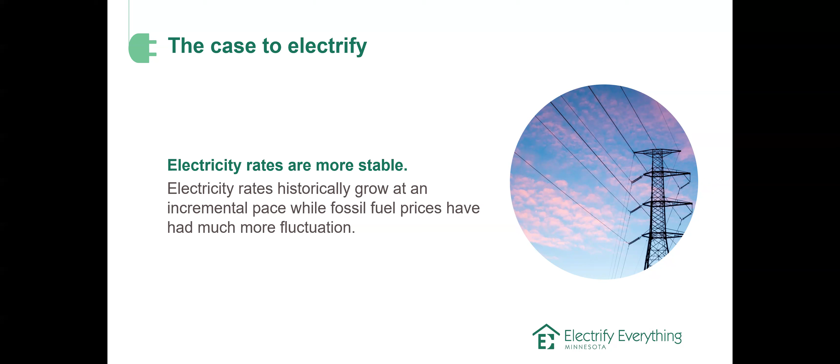Electricity is also safer. A lot of gas appliances like stoves and natural draft water heaters leak hazardous gases back into the house, and those can have really adverse effects on our health. So when we switch to electric, we completely eliminate those health risks. Another reason is that electricity rates are more stable. So the Public Utilities Commission of Minnesota regulates electric rate increases, so they're a lot more predictable and incremental, whereas natural gas is bought on the open market, so there can be really big spikes and valleys over the years, and it's harder to predict.

And then another big one, which draws a lot of us to this topic, is that electrifying your home is one of the single biggest things you can do to reduce your carbon emissions and help the planet. So if you're motivated by helping the environment, this is a really powerful concrete action you can take. So there's a lot of good reasons to electrify, and it can feel complicated and overwhelming at first.

There are a lot of questions that come up, like how do I decide which projects to pursue first? What does my house even need? What are the types of equipment I should be looking at? How do I compare one to the other? What are the resources and how do I make sure I get all the incentives that are available? And then who are the contractors I should talk to? What could I do myself? Who is going to actually install this in my home? So there's a lot of questions, and the goal of our program is to have answers to all those questions in one place.

And like I said earlier, we encourage you to start with where you're motivated and what makes sense for your house. So maybe your water heater is really old and that's where you need to start. Or maybe you really want to reduce your carbon emissions, so we're going to talk about what's the biggest carbon emission impact. Or maybe you just want to do the smallest, cheapest step first, and we'll work our way up. So really, whatever approach you're bringing to this, we want to meet you there and help you start that project.

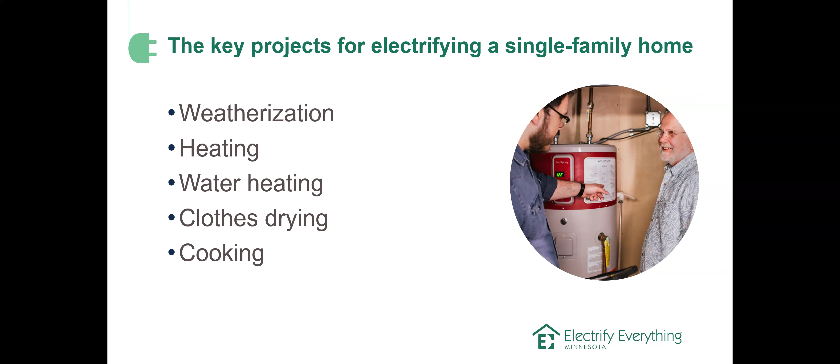So the key pieces of a typical home for electrification are weatherization, heating, water heating, clothes drying, and cooking. So I'm going to go through each of these one by one, starting with weatherization. And again, throw any questions you have in the chat and we'll get to them at our Q&A session at the end.

So what is weatherization? Weatherization refers to the part of your home that keeps the outside out and your inside conditioned air inside. So that's the insulation in the walls in the attic, that's air sealing, all the cracks, and then it's also your windows and doors. So what's the barrier between the inside and the outside? The reason we start with weatherization is that it's really important for electrifying your heating system, and I'll dive into why that is.

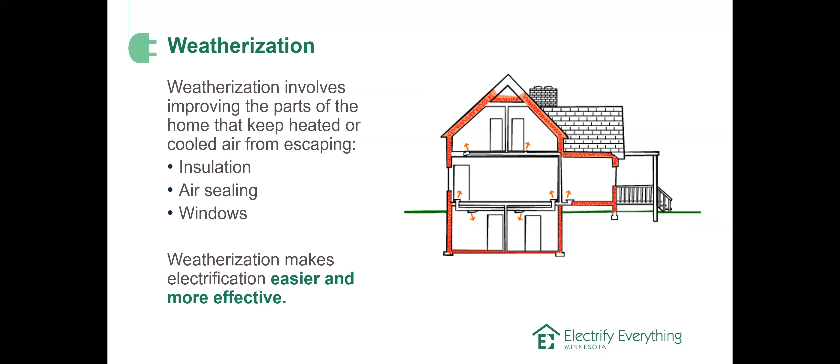But there are a lot of good reasons to insulate and air seal your home. And I think I was surprised by this when I first learned this, and a lot of people are. We live in Minnesota, it's super cold, and yet a lot of our houses do not have proper insulation and air sealing. The reason for that is before 1980, there was not an energy code that required insulation to be put in houses. So homes built before that time often don't have any or lack adequate insulation. But it's a really great first step to take.

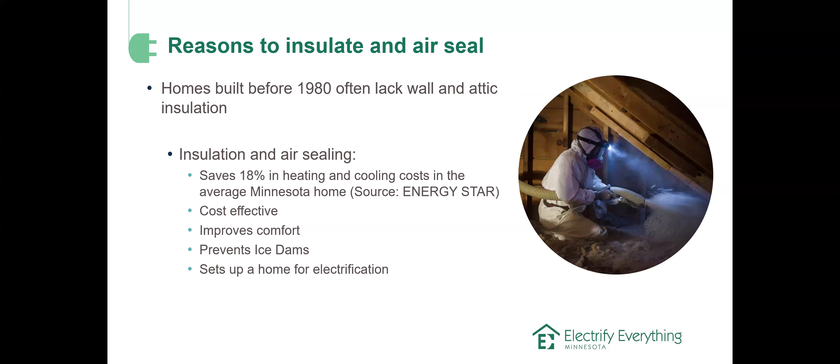So on average in Minnesota, you can cut your heating and cooling bills by 18% by insulating and air sealing. That's a significant amount of money and energy. It's also really cost effective. You're reducing how much energy you need to keep your home comfortable. So you're lowering your energy bills, and that will pay for the insulation, usually in 7 to 12 years. It also improves comfort. We've all been in cold, drafty homes that are not super great to be in. So it really is a big quality of life improvement. You can prevent ice dams, those big icicles. And then, as I mentioned, it sets up the home for electrification.

We can all picture insulation. It's the pink stuff or the white fluffy stuff. But air sealing is kind of the less acknowledged partner of insulation, and it's super important. So air sealing is sealing up all the cracks in a home where your conditioned air can escape. So that's like around light fixtures, your attic hatch, your bathroom fan, any venting pipes that go through the ceiling, and then also things like dryer vent holes. Anywhere there's a crack in your home, that is just letting the conditioned air escape from your house. So it's really important to seal those up along with doing insulation.

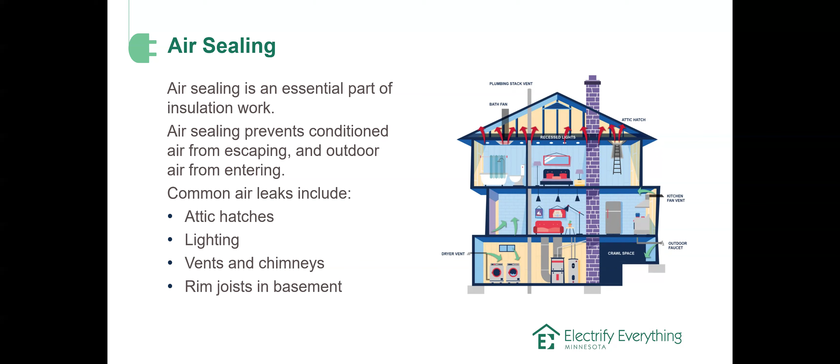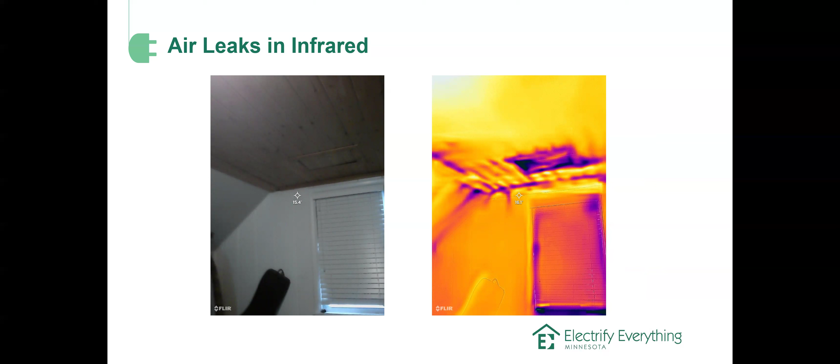Here's a picture from a Home Energy Squad energy audit. On the left is the picture, and on the right, the purple areas are where air leaks are happening. So you can see the attic hatch is super leaky, where the wall meets the ceiling is leaking. Even this wooden paneling has leaks in between it, and then the window too. And in an old house that hasn't been air sealed, all of the little cracks can add up to a 2 by 2 foot hole, which is like having a window open all winter long. So sealing those up is really powerful.

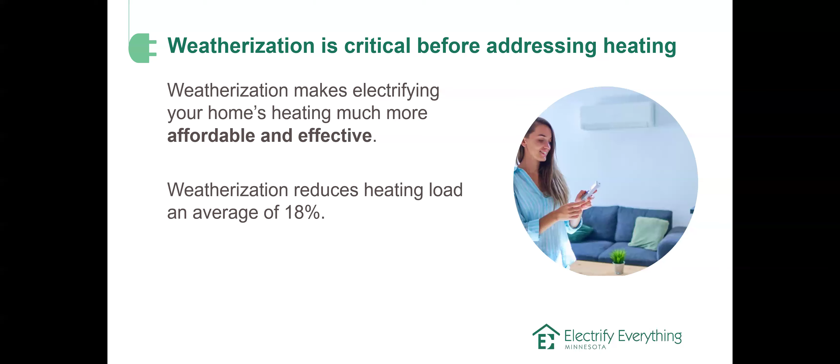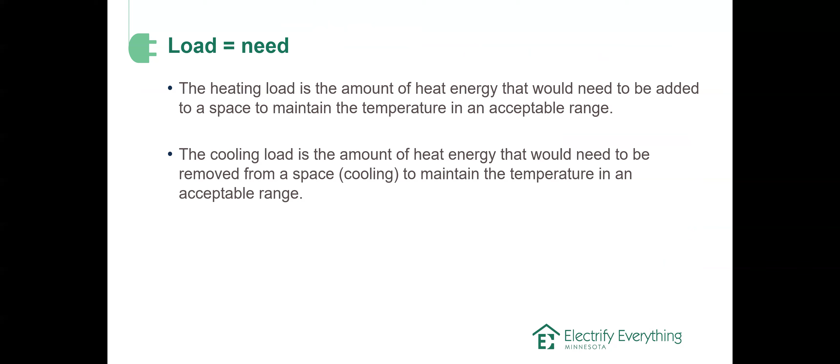As I mentioned, weatherization is really important for electrifying your heating system. And that's because it reduces the heating load required in your house. And the heating load is just simply how much heat energy is required to keep your home at a comfortable temperature. The cooling load is just the opposite. How much cooling do you need in the summertime? So when we're talking about weatherization, we're talking about bringing that heating load down so then the heating system doesn't have to work as hard.

And then starting next year, when the Inflation Reduction Act rebates will go live, there'll be an additional $1,600 that is available to folks earning less than 150% of area median income. There are also some cities that have rebate matches. So if you live in those cities, you may be able to get more incentives.

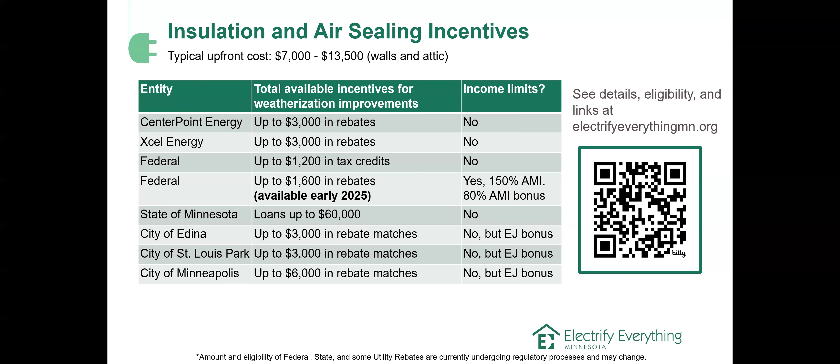So we'll be sharing the incentives for each type of project we're talking about today. And again, you can go on our website, click on the project you're interested in, scroll down to the resources section, click on details and links, and you'll find everything you need to know, including the links to the providers of these incentives.

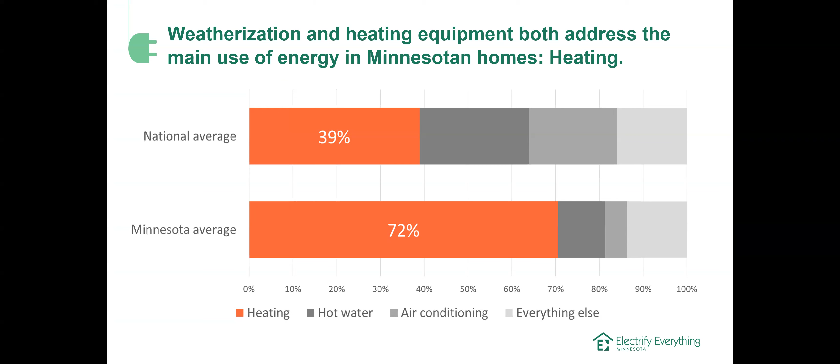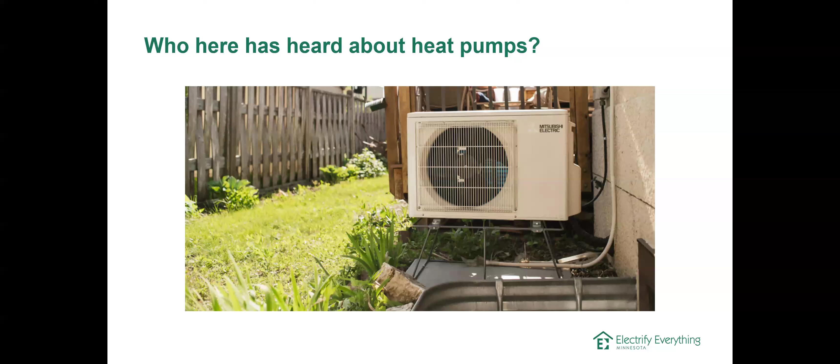So who here has heard of a heat pump? If your camera's on, feel free to raise your hand or give me a little thumbs up reaction if you'd like to. But if you've heard of a heat pump, we're going to be talking a lot about them. I'm seeing a lot of thumbs up. Thanks, everyone.

Heat pumps are basically advanced air conditioners that can also run in reverse. So in the summertime, it works just like an air conditioner. It removes heat from inside your home and moves it to the outside. And then in the wintertime, it moves heat from the outside air into your home, even when it's really cold outside, which is why this technology is so powerful.

Also, when we're talking about electrifying your space heating, it's really important that we focus on heat pumps. This is a really efficient technology because electric baseboard heating, the old style electric heating, is literally just heating up a piece of metal with electricity. It's super energy inefficient. It leads to really high energy bills, and it uses about 3 times more energy than a heat pump does. So when we're talking about switching to electric, going with the efficient heat pump option is what makes the most sense cost-wise, and also for the environment to not use so much electricity.

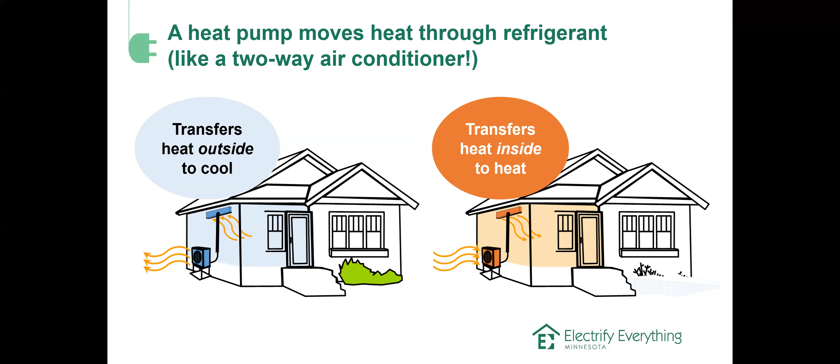Another reason why air source heat pumps specifically are really powerful and a really good option for a lot of folks is they have a lower cost compared to systems like ground source or geothermal. And they're also really flexible, so they can fit in most homes. There are 2 main types of systems that I want everyone to be aware of. One is ducted and the other is ductless.

A ducted or central system would basically just replace your central air conditioner, and then the refrigerant moves the heat into the house, and then it uses the same air handler that your furnace uses. So if you have ducts in your house with a furnace, this is the type of system you would get.

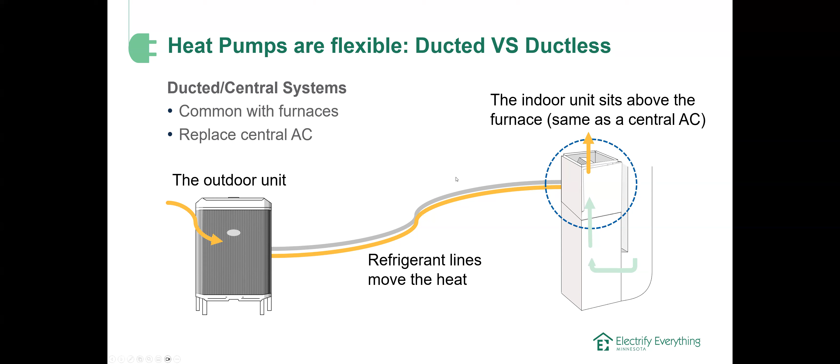The other option is a ductless or mini split system, which is for homes that do not have ductwork. So if, say, you have a boiler or electric baseboard heating, this would likely be the option that would fit in your home. Same thing, it's got the outdoor unit, and then it moves the heat through the refrigerant lines to these indoor units called mini split heads. And you can have one to multiple in your home to heat different parts of the home.

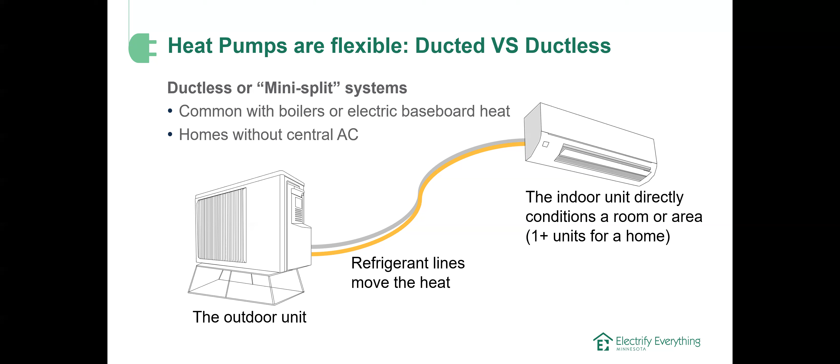So this is a great way to bring air conditioning to a home with a boiler that would have to be using window ACs. And it's also a really great way to heat your home with clean electricity.

All right, now let's talk about the efficiency of cold climate heat pumps. I say cold climate heat pumps because now there are heat pumps that are designed to work in Minnesota's climate, but there are also less efficient heat pumps designed for the southern United States. So when I'm talking about heat pumps, I'm talking about cold climate heat pumps.

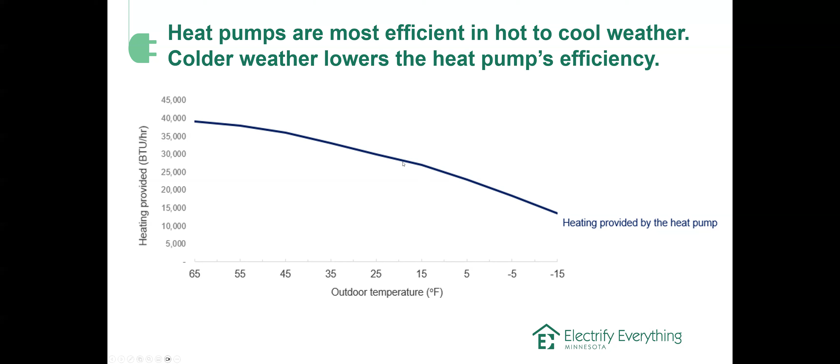So heat pumps are amazing. They can pull heat out of really cold air. That said, they do get less efficient the colder it gets outside because there's less heat to pull out of the air. So what that means is here in Minnesota, when we've got those polar vortex days, it is required that you have a secondary heating system to supplement the heat pump. And I'll talk about the details of that.

Another reason why we talk about weatherization is that as it gets colder outside, a heat pump needs more energy to provide the same amount of heat to the home. So in an unweatherized home, one that doesn't have insulation or air sealing, a heat pump can provide heat to the home in mild weather. But a well-weatherized home that's been insulated and air sealed can provide heat to the home with the same heat pump in much colder temperatures. When we have that smaller heating load, it takes less energy to provide that heating.

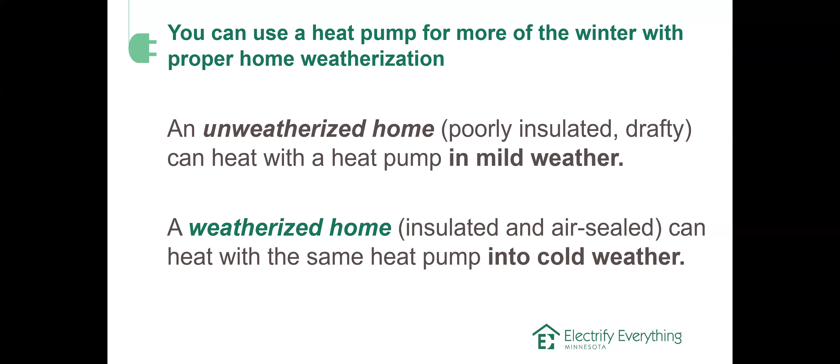The good news is that even though we get really focused on the polar vortex days, when you go outside and the inside of your nose freezes, the vast majority of the winter we spend above 20 degrees in Minnesota, in the Twin Cities area. And above 20 degrees, heat pumps are super efficient and they work really well. So the vast majority of the year, your heat pump is delivering efficient heat to your home. And then in that 20% of the time that's below 20 degrees Fahrenheit, that's when we're going to start talking about the secondary system that you'll need.

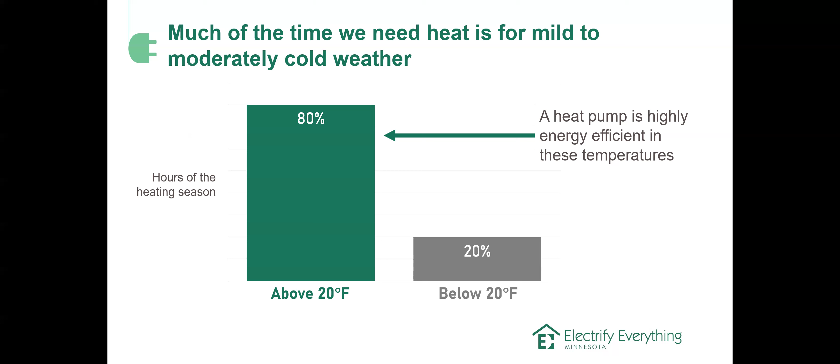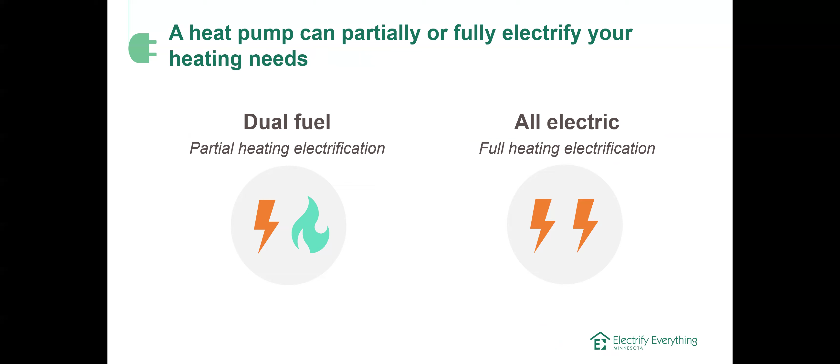So there's two kinds of setups for secondary systems. One is what we call dual fuel. This is where you have an electric heat pump that is paired with a gas secondary system like a furnace or a boiler. And then the other option is all electric. So you have a heat pump and then electric resistance as that secondary. And I'll explain the details of both of those.

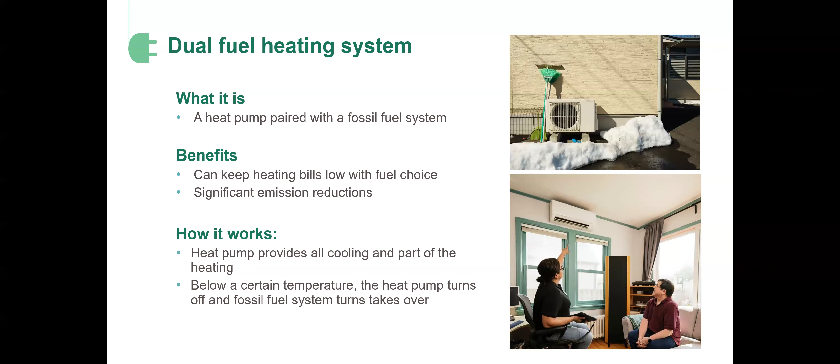So starting with dual fuel systems, this is a heat pump paired with a fossil fuel system like a furnace or a boiler. And the benefits are that it can keep your heating bills low because you can choose, depending on the different rates between gas and electric, whether you're using gas or electric. So you can keep your bills the lowest this way because you have that choice. And it still comes with significant emissions reductions because, like I said, about 80% of the time your heat pump will be heating the home. So basically, it provides cooling all summer and then heating for part of the winter. And then below a certain temperature outside, the heat pump will turn off and the fossil fuel system will take over.

So just to quickly exemplify that: summer, your heat pump's cooling your house just like your air conditioner would. Fall, heat pump is doing all the heating. Winter, your heat pump is heating the home most of the time, and then below the 20-degree mark or whatever you set it to, maybe that's 30 degrees, whatever you like, your furnace or your boiler kicks in. And then again in spring, your heat pump's doing all the heating.

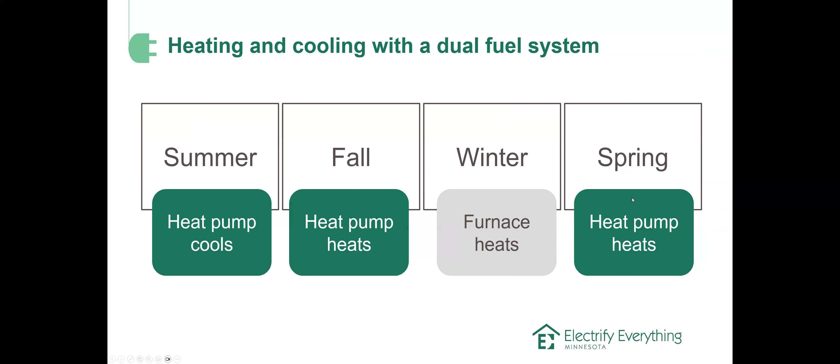So the pros of this are significant decarbonization. You're reducing your emissions by using the electric heat pump. And you have more control over the cost of heating. This is the way to get the lowest energy bills. One of the cons is it's not expensive, but a little more complicated to set up this system because the gas system needs to be communicating with the heat pump system.

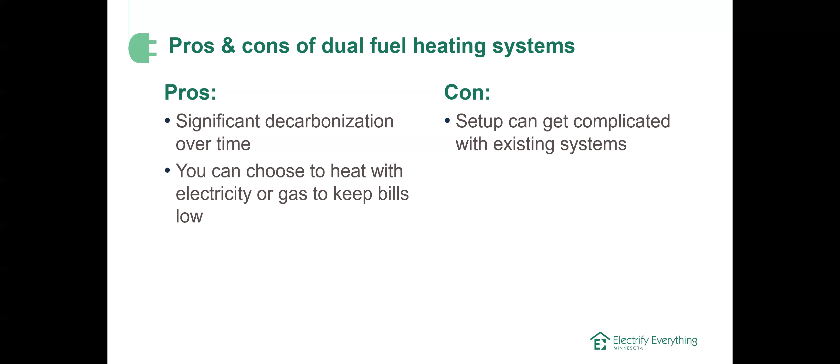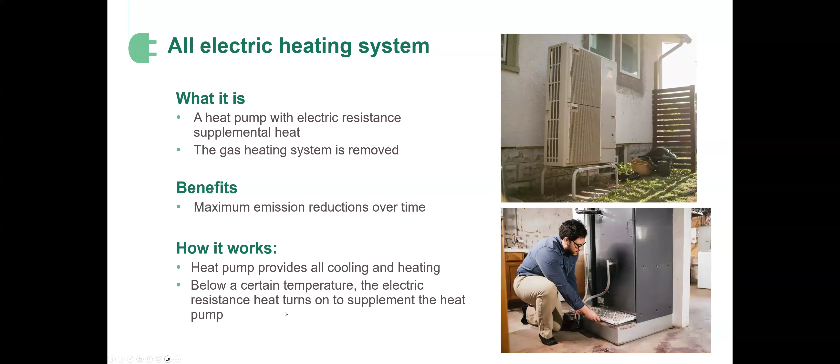All right, the all-electric option is next. So this is where the heat pump just has a secondary electric resistance booster heat. So you would remove the gas system completely. This is the way to completely electrify your heating and maximize your emissions reductions. And the way it works is the heat pump cools your home in the summer, heats in the fall, and then in the winter the heat pump keeps running all the time, but on those really cold days below 0 degrees, the secondary system will kick in to provide that little bit of booster heat that you need to keep your home at the temperature you set it at. And then again, in the spring, the heat pump's doing all the heating.

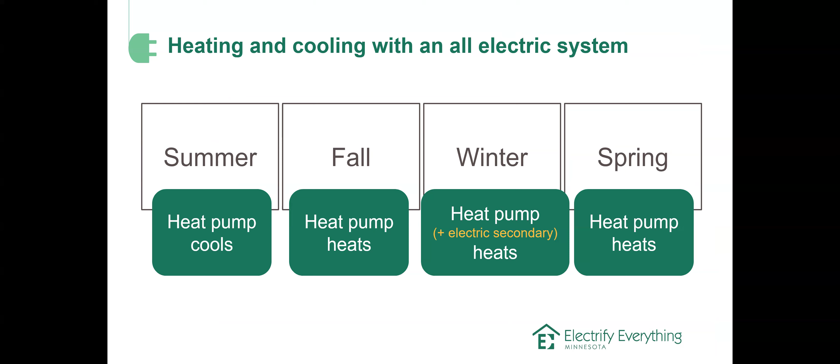So the pros of an all-electric system are that they maximize your decarbonization. You can eliminate your emissions from heating, and they can be simpler to set up because it's just the heat pump with that simple electric resistance secondary. The main con with an all-electric system is that your winter heating bills will likely be more expensive. This is because, like I mentioned earlier, electric resistance is very inefficient, and electricity is a more expensive fuel than gas right now. So on those really cold days when the electric resistance needs to kick in, that'll drive up the bills a little bit.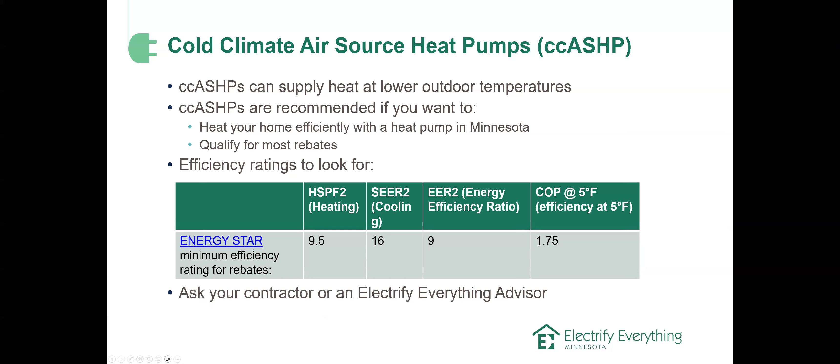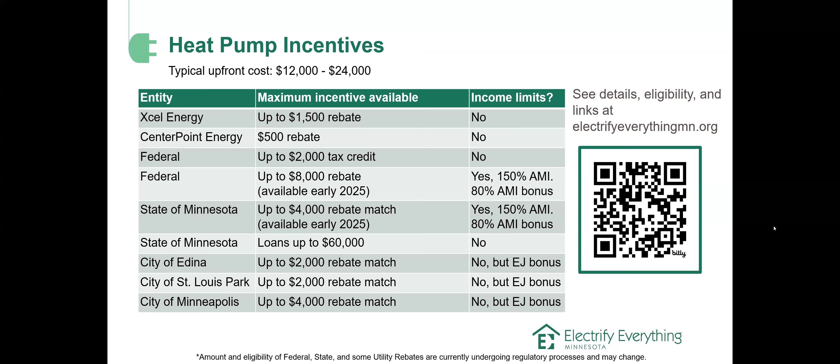Okay, we're going to keep it moving. So we talked about weatherization and heating. Now we're going to talk about your appliances. So water heating, cooking, and clothes drying. All right, starting with water heating. So after space heating your home, water heating is usually the next biggest energy user in a home.

So who here has heard of heat pump water heaters? Feel free to give me a thumbs up reaction again. Great. So heat pump water heaters are electric water heaters that are super energy efficient. They are about 3 times more energy efficient than a standard electric tank. And they're safer than gas because they don't have that exhaust system that can backdraft and leak back into your house.

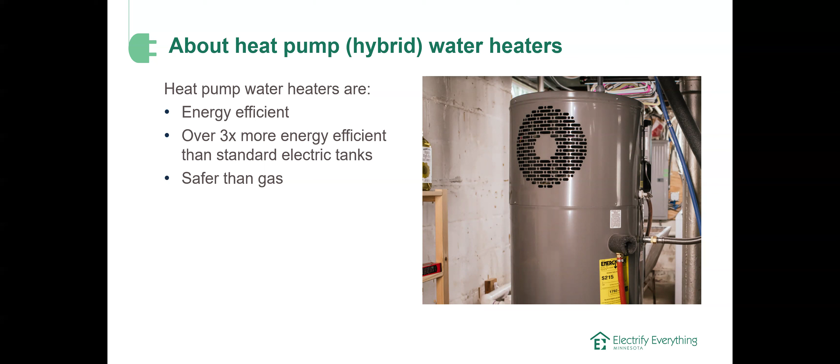And the way they work, it's basically a heat pump, like I've just been talking about, strapped to the top of your water tank. So the heat pump on top pulls in air, removes the heat from the air, puts it into the water. There's also an electric resistance element inside if you need a little boost. And then from that, you get hot water out, and also a little bit of cooler, drier air is exhausted.

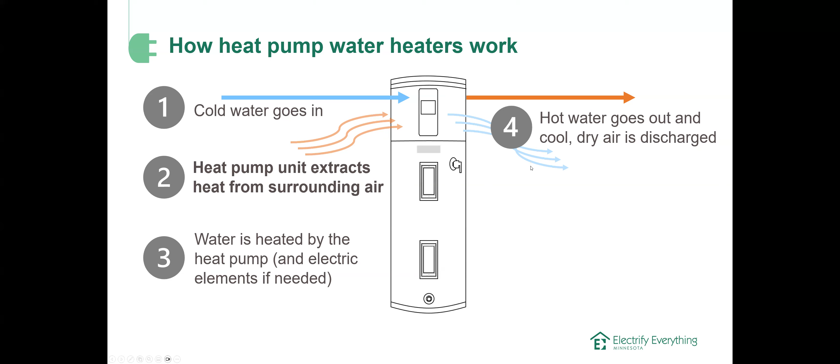So compared to an electric resistance water heater, that's like your traditional water heater that just has a metal rod that's heated up with electricity to heat the water, the heat pump water heater has the heat pump element and that traditional resistance element as well. So heat pump water heaters are much more energy efficient, have much lower energy costs. And since they're pulling air, they do dehumidify a little bit, which can be a nice plus. They exhaust a little bit of cool air into the space that they're in.

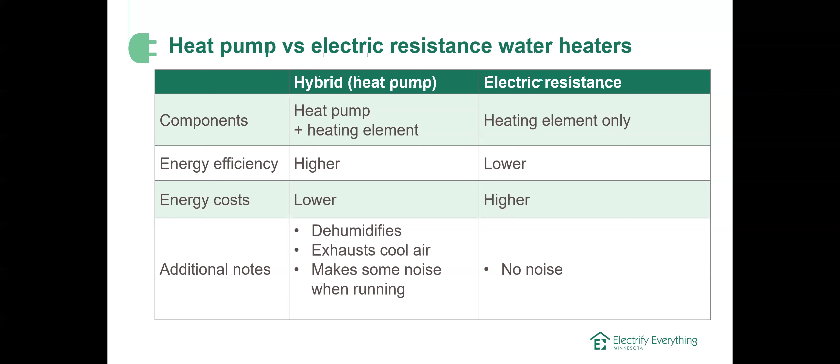So typically a heat pump water heater will run 3 to 4 hours a day. During that time, the temperature might drop 1 to 2 degrees in the room. Usually people don't notice it unless it's in a living space. So that's just one thing to know. And they do make a little bit of noise just because they have that fan on them. So it's similar to a bath fan level of noise, a quiet bath fan.

But really the exciting thing about a heat pump water heater is how much more efficient they are. So compared to a standard electric water heater, you could save $300 to $500 a year on your energy costs. So that would pay for itself very quickly. If you replace a standard gas water heater with a heat pump water heater, you can expect the energy costs to be about the same, or you might save up to $175 a year.

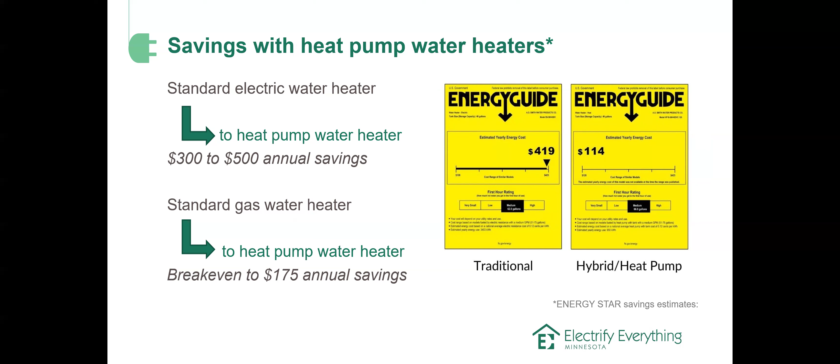And right now we're seeing heat pump quotes coming in around $4,000 to $5,500, and I'll show you the rebates later. Right here. So yeah, 4,000 to 5,500, and Xcel Energy has up to $500 rebate, and then there's some significant tax credit, and then the IRA rebates as well.

All right, so that's water heating. Again, heat pump water heaters are a much better option than a traditional electric resistance because you'll save so much on your energy bills.

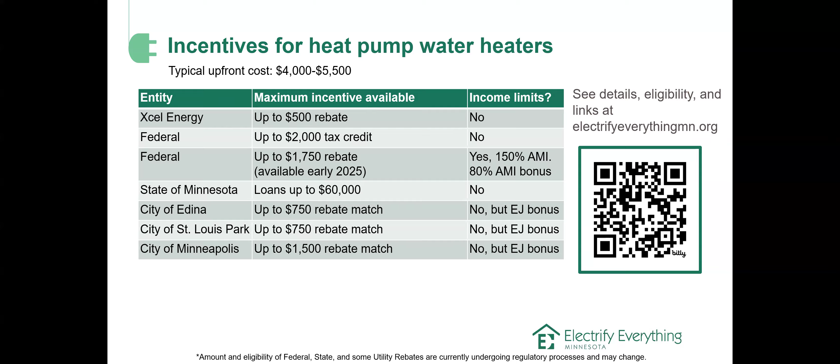All right, so cooking. Induction ranges are the exciting new thing in the cooking world, and it's really not that new. So induction ranges transfer energy directly to the pan using electromagnetic currents. So instead of heating up the air around it like a gas stove would, or heating up a piece of metal that then heats the pan, this is directly heating the pan.

So they boil water extremely quickly, and they heat up and cool down just as fast or faster than gas. So people like it for the control that they get cooking. The cooktop doesn't heat up super hot because it's heating the pan directly. They're really easy to clean.

And then the one important piece to note is that the cookware you're using needs to be magnetic. So cast iron, stainless steel, ceramic cookware is all compatible with induction. But aluminum and copper pots are not compatible. So sometimes you'll have to replace your cookware. So these are a great option for folks who really like the control they get with a gas stove but want to go electric.

And then traditional electric ranges are also a good option here. So unlike water heaters and heating systems where the heat pump technology is really important to focus on, cooking is a relatively small amount of energy use. So going with the traditional electric option is a good option.

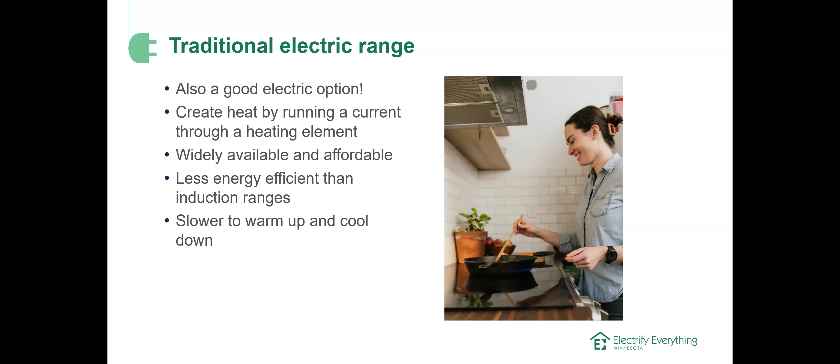So why are we talking about electrifying our cooking? The big thing here is health. Gas stoves release hazardous pollutants into the home, and since the kitchen is usually a gathering place, that's where we like to be. It's the center of a lot of homes. These stoves are just leaking those hazardous pollutants right into the spaces that we breathe in most. Gas stoves can even leak when they're turned off.

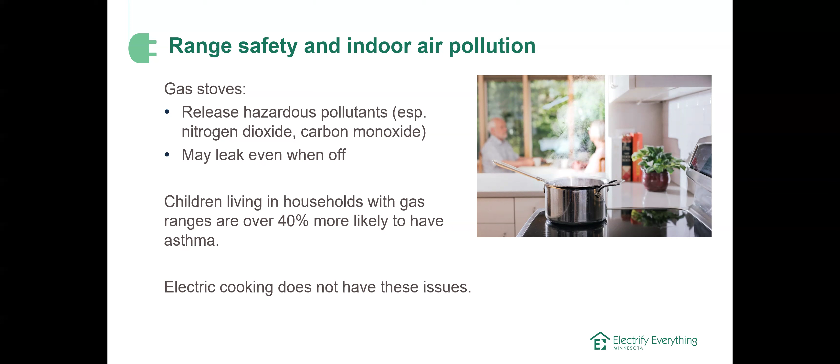And yeah, so there are health concerns, and studies have found that children living in households with gas ranges are over 40% more likely to have asthma. So ventilation is really important, and electric cooking completely eliminates this health risk by not having any combustion gases. There are fewer incentives for cooking, but still some. So next year, when the IRA rebates come out, there will be up to $840 for an induction or a traditional electric range.

All right. And then let's chat about clothes drying. There's two options here. The first one is a heat pump or a ventless clothes dryer. These clothes dryers use heat pump technology and they recirculate warm air around the clothes to draw the moisture out of them. And because of this, they do not need venting.

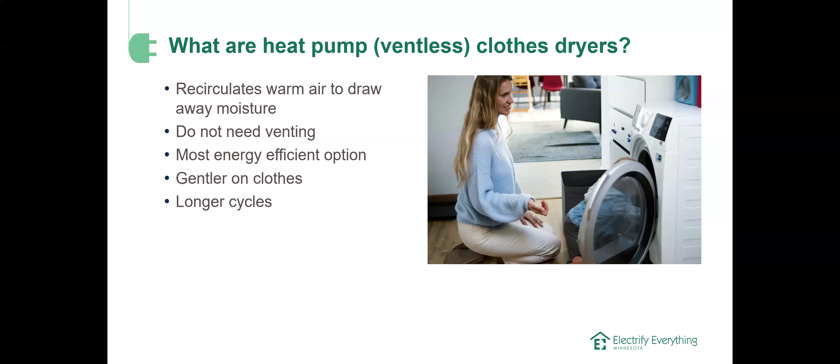So these are really great for folks who want to move their dryer like into a closet or onto the main floor where they don't want to punch a hole in the wall to run the venting pipe. So they're very flexible in that way. They do need a hose to a drain to drain the water that they extract, or you can have a pan that it drains into. They're also gentler on clothes and they are super energy efficient. They use about half as much energy as a traditional electric dryer.

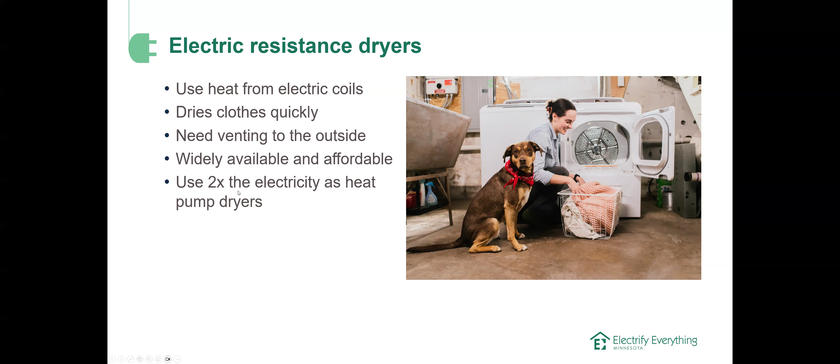That said, traditional electric dryers are also a great option. They come in a lot of different price points, from very cheap to higher end. And these just use traditional electric resistance, heating up coils with electricity to dry the clothes. They do need to be vented to the outside, and they, like I said, use about twice as much energy as a heat pump dryer. All right. And then last but not least, there will be up to $840 in IRA rebates when those come out next year in 2025.

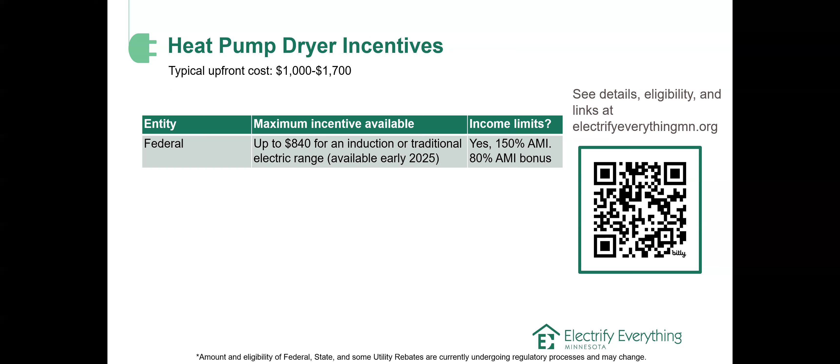Okay, so those were the main areas of the home. Weatherizing your home, electrifying the heating system, heat pump water heaters, induction and traditional electric cooking, and then heat pump and traditional electric clothes drying. Those are the areas in the home that typically use gas, and tackling those one by one is how you will electrify your home. That said, a lot of us live in older homes that may need some work to get ready to electrify. All right.

So, common upgrades that are needed in older homes are an upgraded service panel or modern wiring. Some homes built before the 1940s may have knob and tube wiring, which can be a fire hazard and also likely need to be replaced to install more electric equipment in a home. And then the service panel is really what limits how many different electric appliances you can have in your home.

So a common upgrade is going from a 60 to 100 amp panel to a 200 amp panel if you want to fully electrify. That said, if you're doing it step by step, you may not need a new panel if you want to just start by installing a heat pump, for example, or start with a heat pump water heater. You may have enough space on the panel to do that.

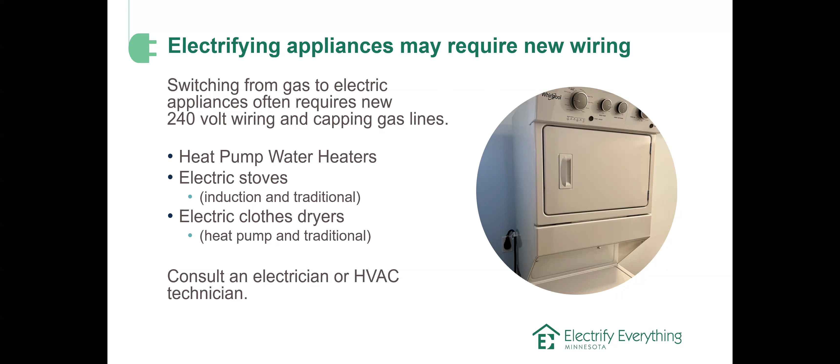So electric panels can sometimes sneak up as like, shoot, I didn't want to have to do that, or that was a surprise cost, because you get really focused on the shiny heat pump or the shiny stove, and then the wiring is what's needed.

So there are significant incentives available for this as well. Right now, there's just a $600 tax credit. But next year with the IRA rebates, there will be up to $4,000, and then the state is adding up to an additional $3,000. And then there will also be money for wiring from the IRA.

Okay, so now we're going to talk about the different resources that are available to help you electrify your home and tackle the first project that you want to tackle. Like I mentioned, we want to help you wherever you're at. So maybe you're just taking stock of your house: how old are the appliances? What should I do first? Or maybe you really want to reduce your carbon emissions and you're like, I'm getting insulation and I'm getting a heat pump. Wherever you're at, we want to meet you there.

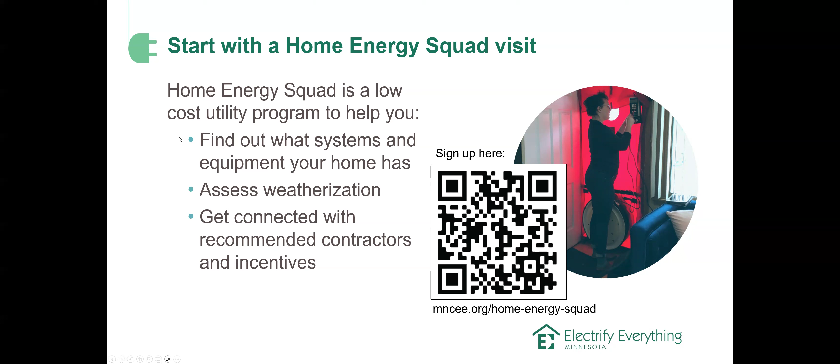Okay. And then another important piece is finding contractors that are experienced and eager to install these pieces of equipment in your home. It's always disappointing if you're really excited about something and you get a contractor into your home and they tell you like, oh no, that's a terrible idea. Why would you do that? So what we've done is created lists of contractor networks who have gone through trainings and are really experienced in installing these different types of equipment.

So for heat pumps, there's the Minnesota Air Source Heat Pump Collaborative's Preferred Contractor Network. It's a mouthful. They have a lot of contractors in the Twin Cities that are very experienced at heat pump installs. And I'll put these links in the chat in a little bit. Insulation, the Home Energy Squad has a list of partner contractors that do really good work. So that's a great place to start. Also, in a Home Energy Squad visit, the auditor can write an insulation quote that these contractors will honor. So that can kind of save you time there.

And then lastly, we created the Heat Pump Water Heater Installer Network that provides a list of installers of heat pump water heaters who are experienced and know what they're doing and can help talk you through all the options.